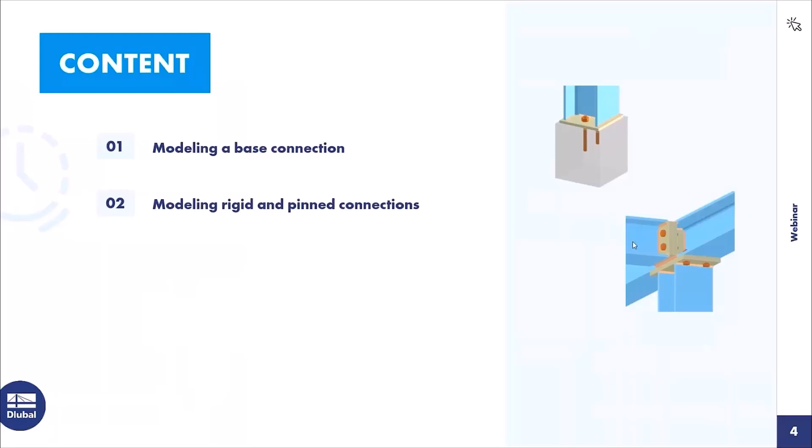For today's agenda, I will model different connections. I'll start with a base connection, then rigid and pinned connections. Then follows the connection design, and we do a stiffness analysis. The next point is result evaluation and documentation, and the final point is an outlook.

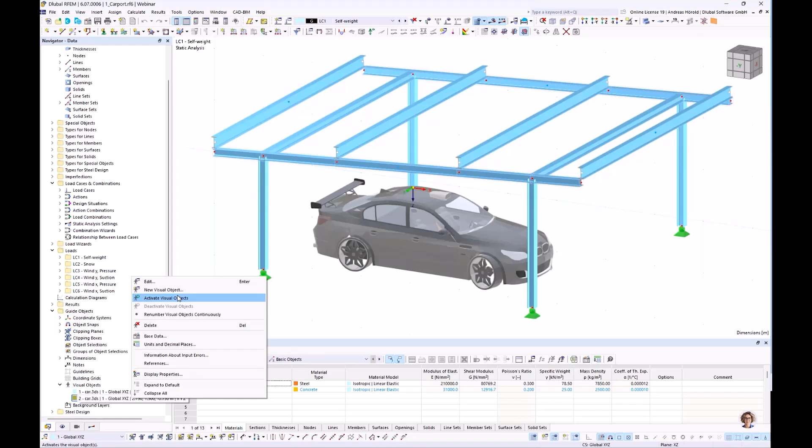That's the model for today: a larger carport with dimensions of 6 meters by 7.5 meters. I'll display two guide objects—visual objects—which I activate: two cars so you can estimate the dimensions of the carport.

That's the reason why it's made of steel. It's a little bit larger than a normal carport. Okay, I'll deactivate the guide objects now.

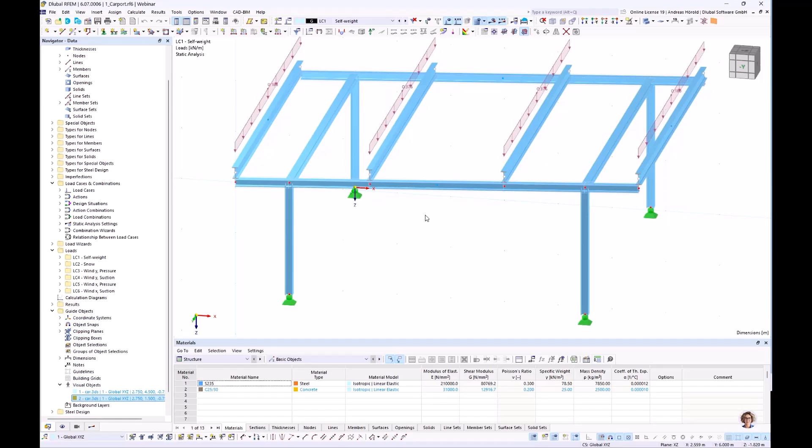So we have different load cases: self-weight, snow, and wind in all directions. Then there are different load combinations for the ultimate limit state and for the serviceability limit state design, as well as load combinations for the design of lifting up.

So then I did a steel design. Design ratios by members—all designs are fulfilled, with larger and higher design ratios in some members.

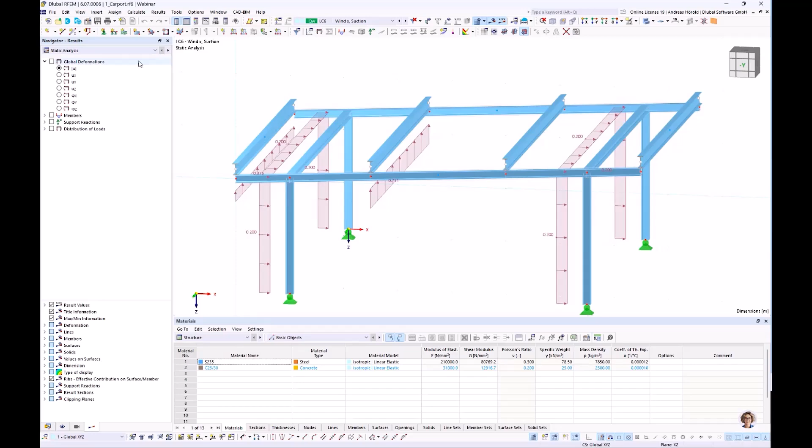Then we activate the steel joints add-on in the base data add-ons. Steel design is already activated, and we activate steel joints so we can design all the joints of the structure. For standards, we use the Eurocode and the German National Annex for the load cases, classification, and combination wizards for steel design and also for steel joints.

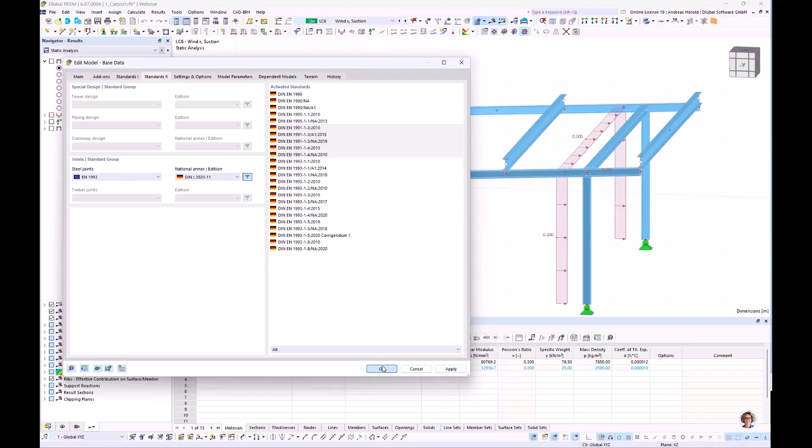So then we start with the first joint. I right click on that node and choose create steel joints. It's only one member, so the type is 'ended'—that's clear.

Let's turn back to main and check the ultimate configuration—that's default. You can perform a buckling analysis, which is useful if you have larger plates such as webs. That's quite important: the design check for the plates has a limit plastic strain of 5%, also for the welds. You can change that, but I'll leave it, since that's the value from the Eurocode standard. I'll leave all the other settings as they are.

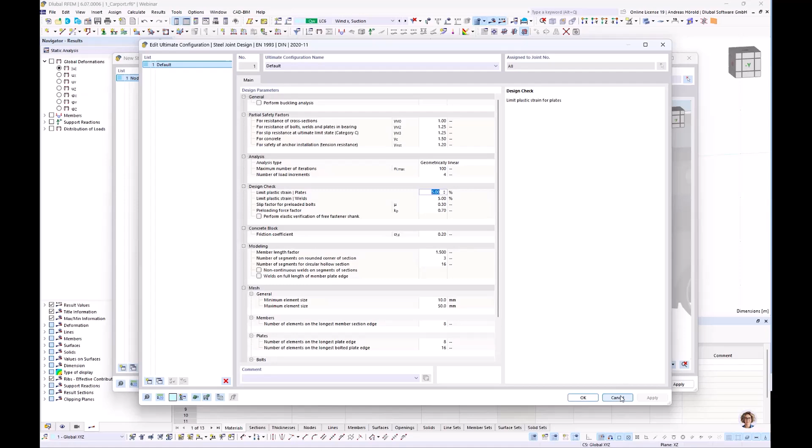Then we turn to components, and I can press insert component at beginning or at end—it doesn't matter. I select this component: base plate. Now we have different modifications: stiffening elements, connection elements, and others, including fasteners. You can move the mouse over the image and see a tooltip showing what connection or stiffening element is available. So I select base plate.

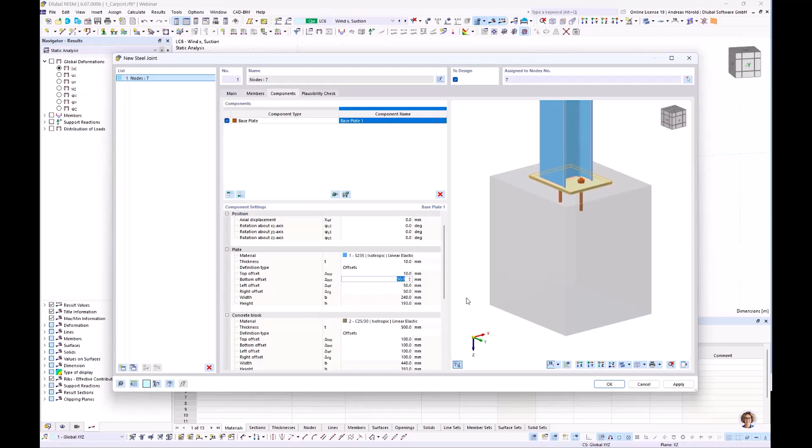That already looks quite good. That's a concrete block—we decrease it a little bit. Let me enter some values: the thickness of the plate should be 10 millimeters, and the top offset in all directions is 10 millimeters. To overtake the previous value, you can press F8, F8, F8—then we have the value on all sides.

So then the thickness of the concrete block should be 200 millimeters, and I define the offset again—also a very small offset of 10 millimeters. I overtake it again with F8.

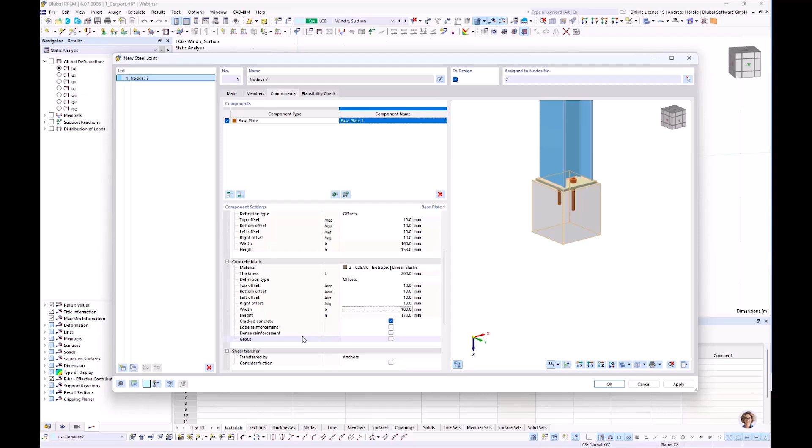So then you can consider cracked concrete—we do that. You can also consider edge reinforcement, dense reinforcement, and grout. You can display that grout, but no, we don't use a grout. Then you can consider the shear transfer by anchors, and you can also consider friction if you want.

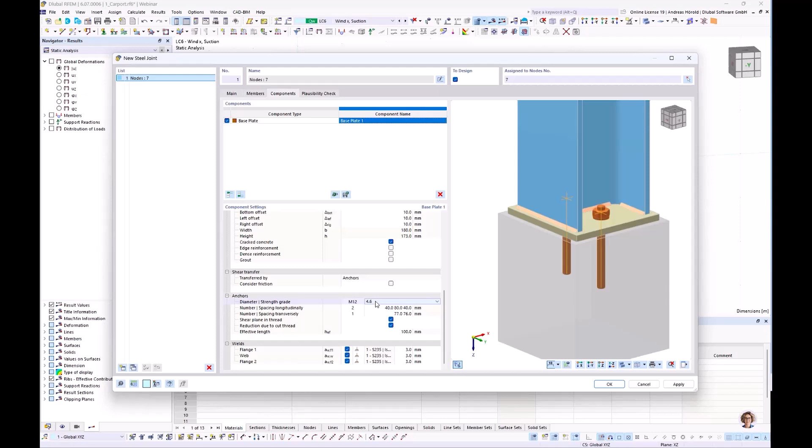So then we turn to the anchors. M12 is okay in our case, and we choose 4.6 for the strength grade. These dimensions and distances are okay.

Then we change that value so it's exactly in the middle. The shear plane should be in the thread, so we consider the reduction due to cut thread. So the length of the anchors should be 100 millimeters—that's okay, and the welds are also okay.

Yeah, that was very quick—that's all for this joint. We do the plausibility check, and that's okay. We take a look at the model, and now you can see the joint, or the column base joint, here.

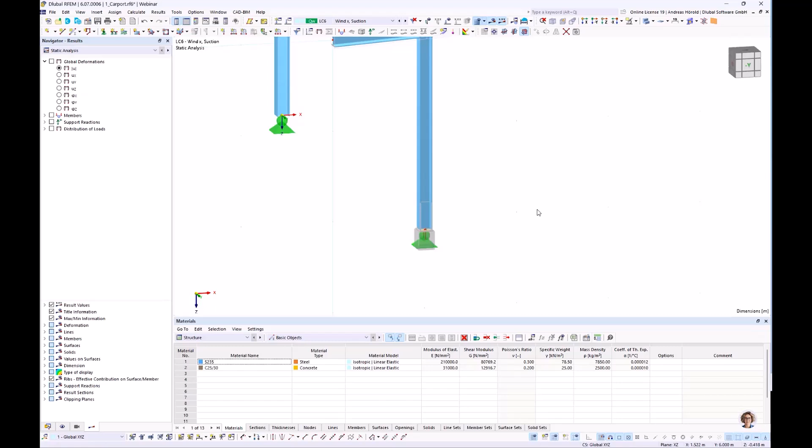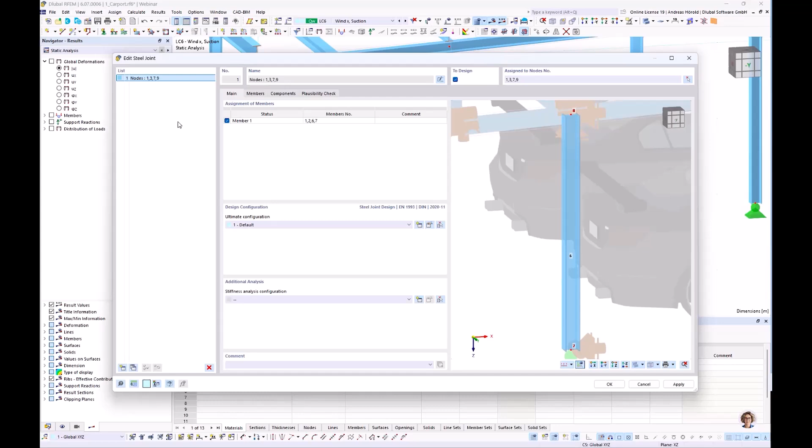You can disable it when you press no joint model, or you can display the simplified joint model right above here. But we would like to display the detailed joint model. So I double click on the steel joint again, and I assign also the other nodes right above - this one, this one, and this one.

Now all 4 nodes are selected. So the next joint is the frame corner. We can see in the model the steel model is stiffened in all directions by frame corners - in this direction, also in this direction. There are no bracings.

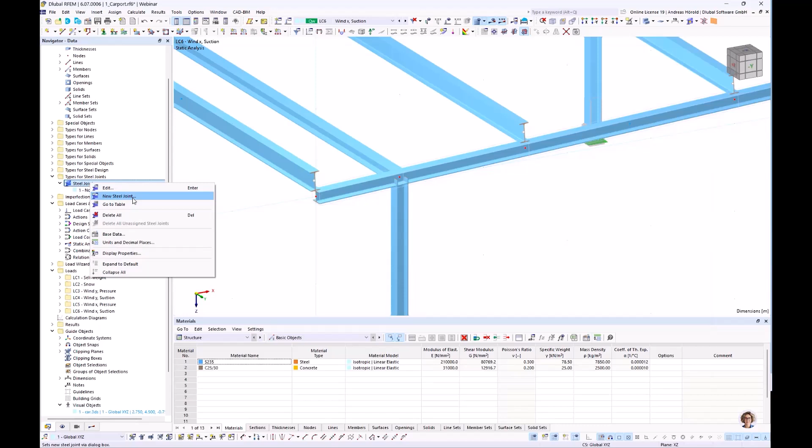And we would like to define the connections on the frame corner. So I show you another way to do that. You can see in the navigator data the types for steel joints. One steel joint is already there, and I can do a right click and press new steel joint. But now I have to assign the node.

For members, those 4 members are connected in that node, and we would like to do a stiffness analysis for the frame corner. So that's why I select initial stiffness, no interaction. Let me go to the settings. Initial stiffness is selected.

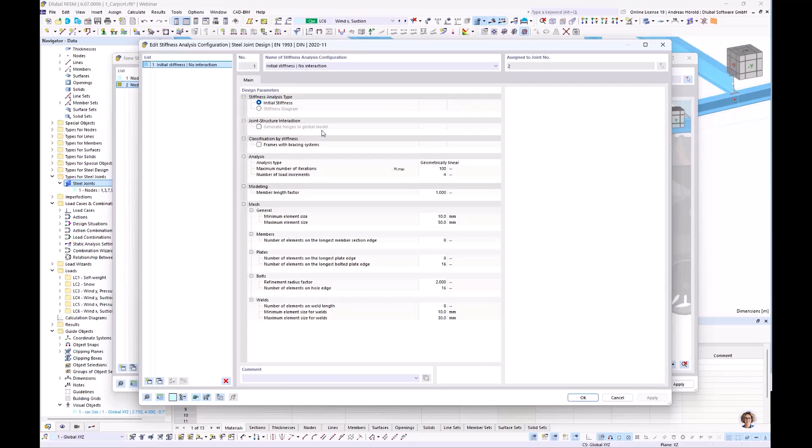For the future, there will be another stiffness analysis type available, the stiffness diagram. That's for larger connections with high loadings, where you can consider the plastic behavior. Then in the future you can select generate hinges in global model. That's not yet available, that's why we do that by hand later. Okay, that's all.

So we turn to members. At least one member should be supported - that's ended. This one is continuous, and automatically member 3 is also continuous selected. So for the column, we would like to do a stiffness analysis.

The program should calculate the stiffness of the joint in or around Y and around Z, meaning M,Y and M,Z. And for this horizontal beam, there should be also a stiffness analysis M,Y.

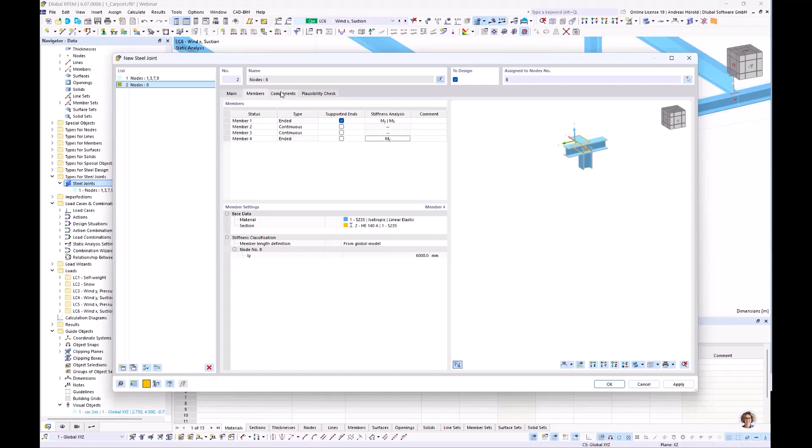So then we turn to components. We insert a component, and this time an end plate. You can move over it, end plate in the middle. So the connected member 1 should be the column - you can see it's selected in the right window with the yellow selection.

And the reference member should be the member 2 and the member 3. Okay, so you can already see a connection.

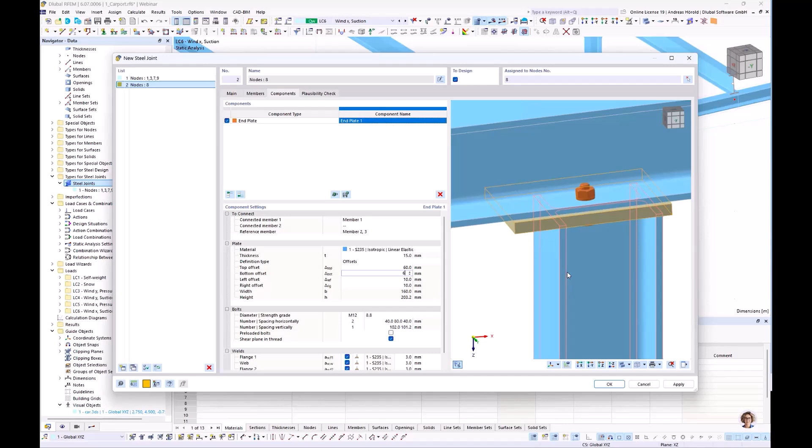Now we have to modify it with the next steps. So the thickness of the plate should be 15 millimeters, the offset in this direction should be 60 millimeters, also in the other direction. And in this direction, there should be no offset.

Now you can see the changes in the window anytime. So M12 is okay, but we choose 10.9 as strength grade.

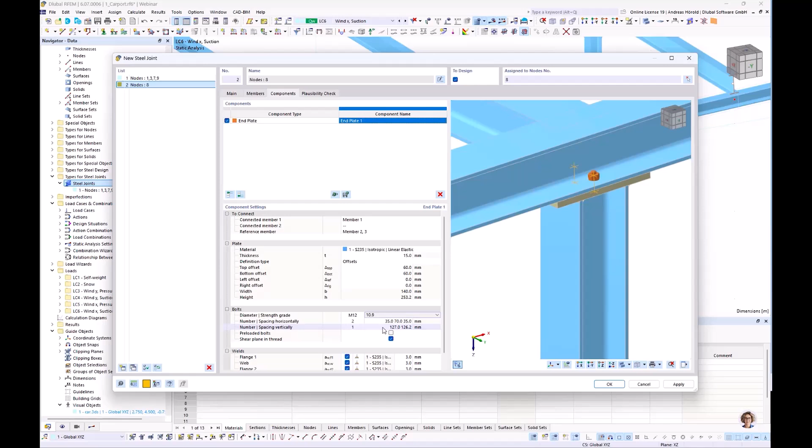So that's okay, all those distances, but we select also for the spacing vertically 2, and I select these values, and that looks quite good.

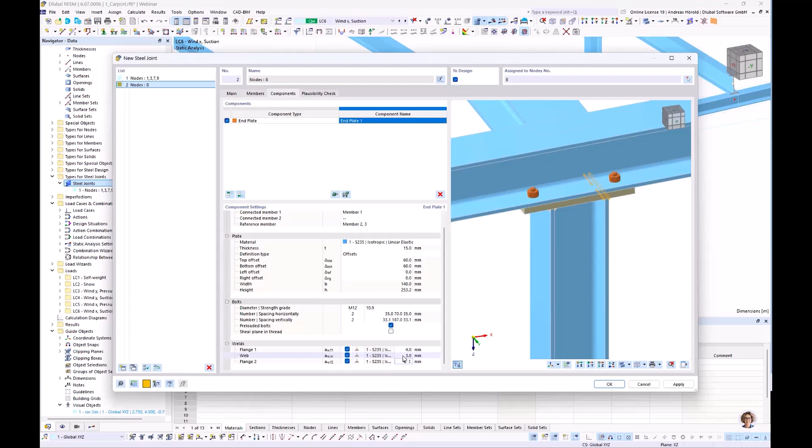We use preloaded bolts for this connection, and the shear plane shouldn't be in thread. And I change the welds for the flanges to 4. Now you can see anytime what parameter should be defined.

So that's all for the connection of the column to the horizontal beam. And now we would like to connect this horizontal beam with this horizontal beam.

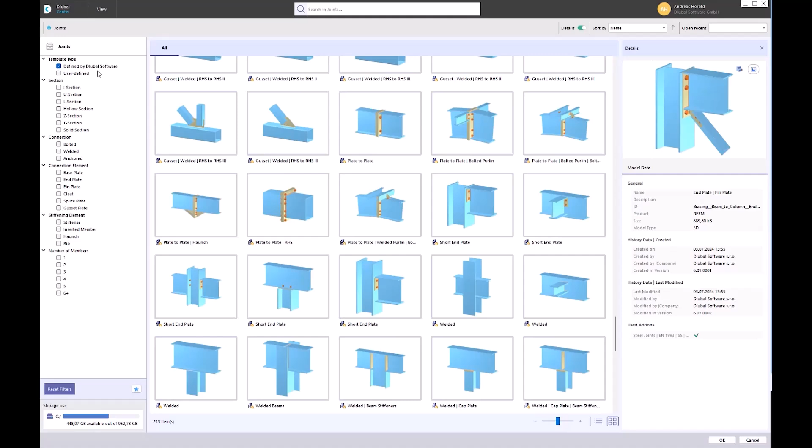That's why we insert a component from the library. So I select that. And what's quite new, the library is in the Dlubal Center. Now you can see different template types, also user-defined from me. So I select only the defined connections or joints by Dlubal Software.

We've got the I section. The connection is bolted, and there are 3 members in the connection. So we would like to select end plate to plate. That looks quite good.

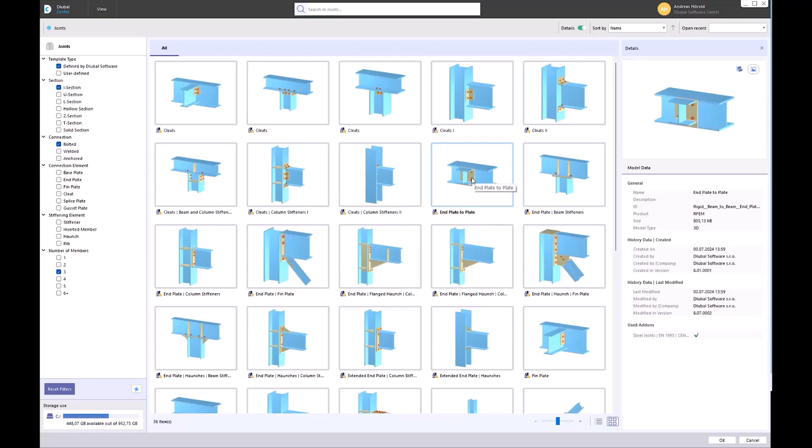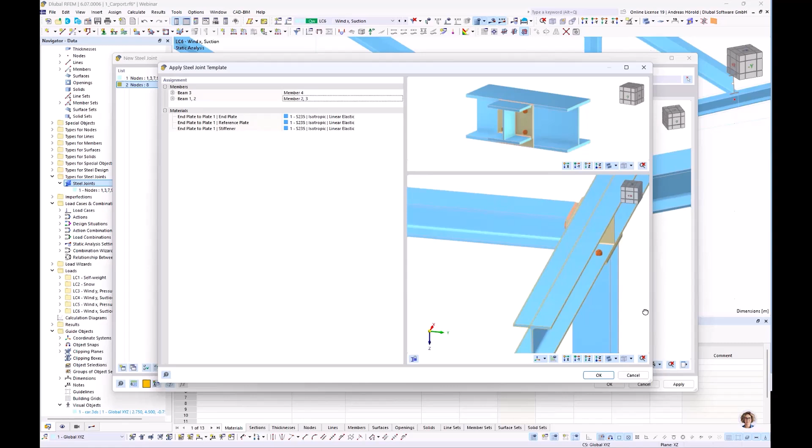So I double click on it, and we should see a preview in some seconds. But at first we have to select the member that should be connected, be member number 4, this horizontal beam, to member 2 or to the members 2 and 3. The preview looks quite good, and we can overtake it with OK.

So let me change the values. Also a thickness of 15 millimeters - no, we have to select that line. Thickness of 15 millimeters, okay. Minus 7.5 is okay, that we can consider a weld here.

Okay, all the values for the end plate 1 is okay, but we have to modify the reference plate - 15 millimeters. The top offset and bottom offset is okay, but I decrease the width, so that we have the same dimension as the end plate. So it should be stiffened.

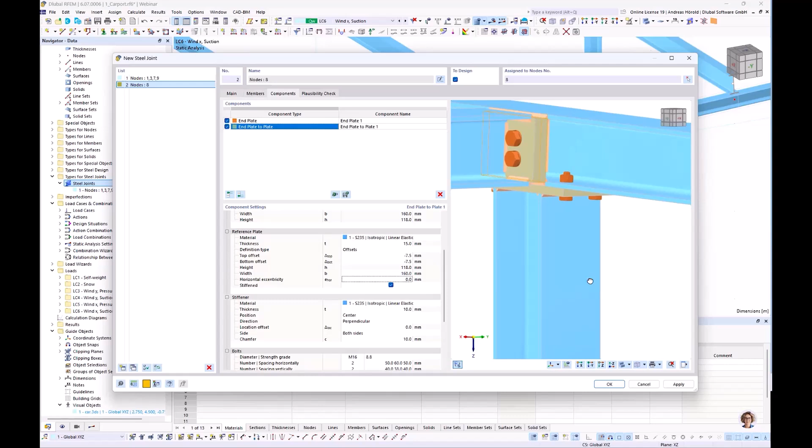Okay, but not on this side, because we would like to define two stiffeners here in the back, but we can't do that because the connection would be closed. So center is okay, but not both sides, only one side.

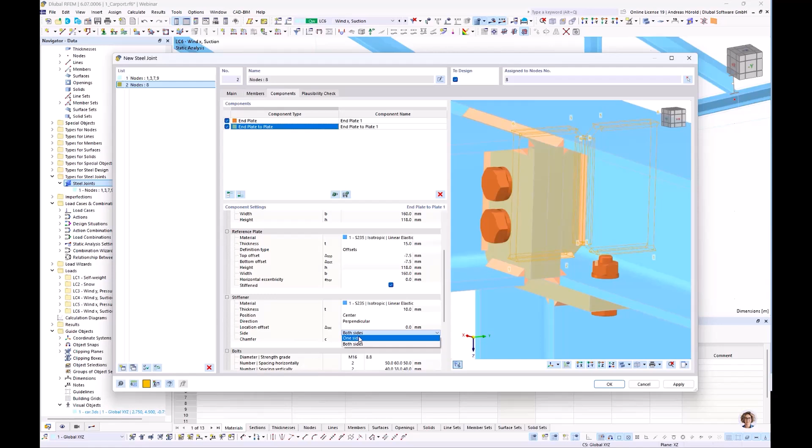So now this stiffener is disappeared. Okay.

So then the diameter should be M12, 10.9 as strength grade.

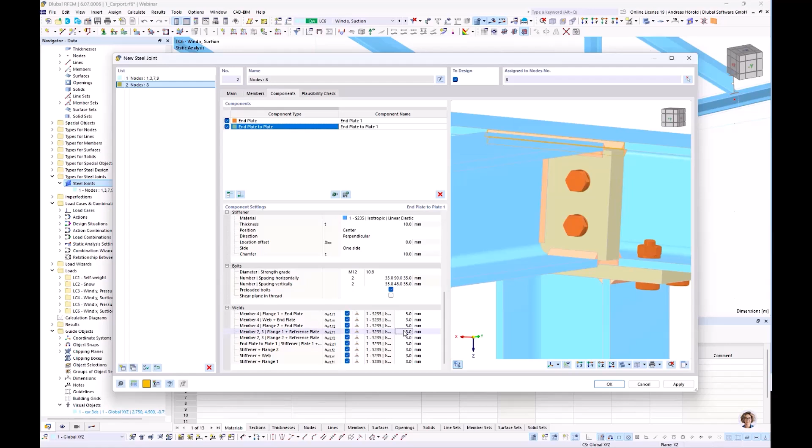So let me change the spacings - 35, 35, then also here 35. Okay, so preloaded bolts and the shear plane shouldn't be in thread. The welds are okay, 5 mm for the flanges and 3 mm for the webs.

Okay, so then we have to add the stiffeners here. I insert a component at the end - you can see the stiffener here. The stiffened member should be this one, the horizontal beam, and the reference member should be the column.

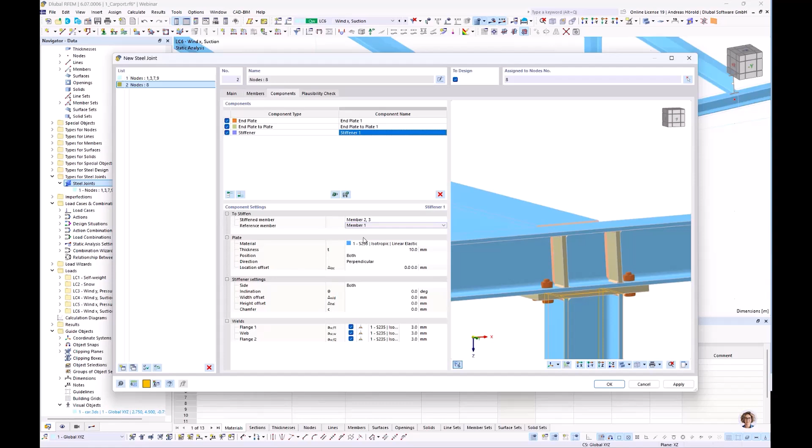So then position is okay.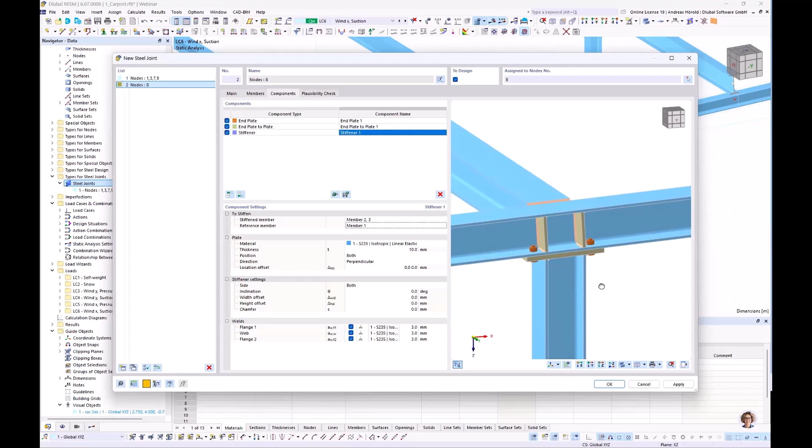You can say perpendicular or parallel. Sorry, that was a wrong click. So that looks quite good.

But it shouldn't be on both sides. You can see that would be closed here. That's why we select the right side. Then we have only the stiffener on this side.

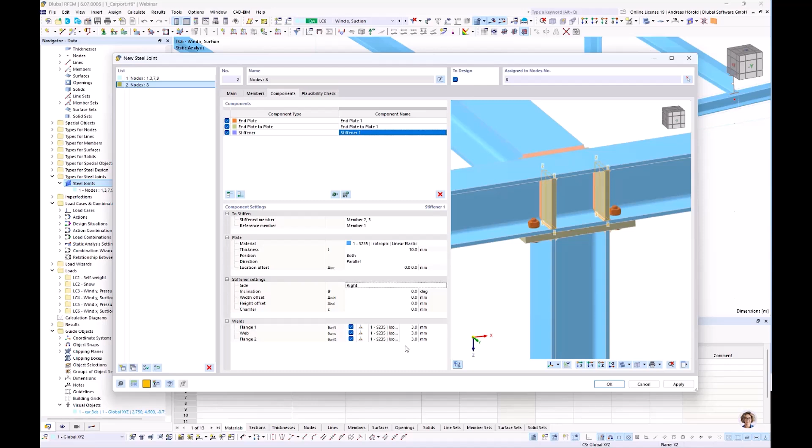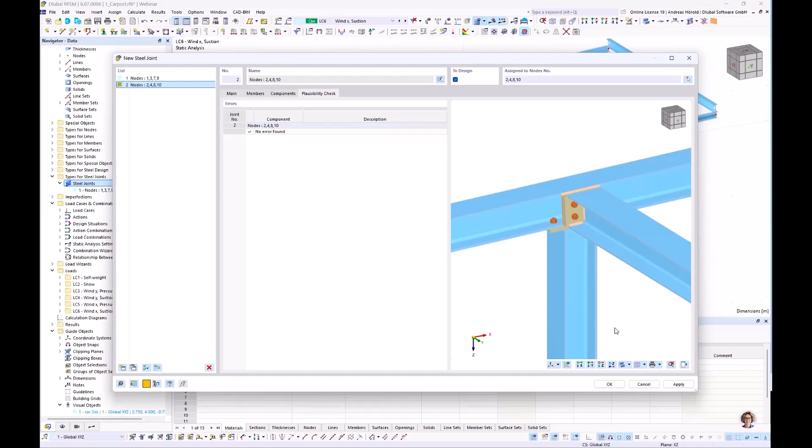Okay, so the welds for the stiffeners are okay, 3 mm. Plausibility check is okay. I can select also the other frame corners. Okay.

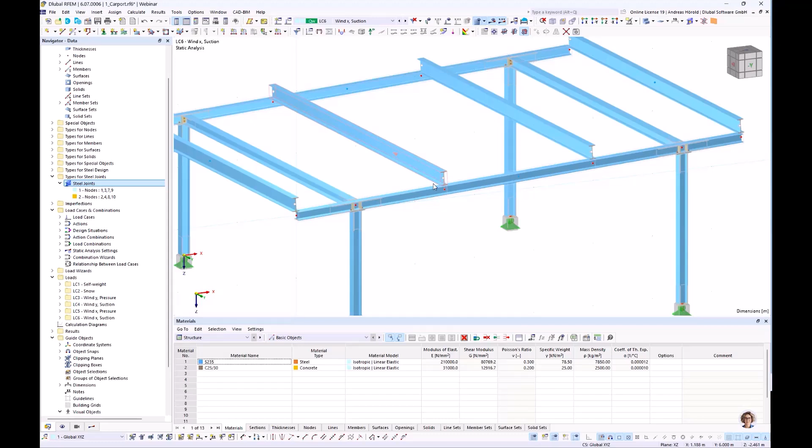We can display all in the model. Okay, that looks quite good. Then we add joints for the purlins. I do a right click, create steel joint.

So then members are, those are the 3 members. This one is supported and also continuous. And member 3 is also continuous. So then component.

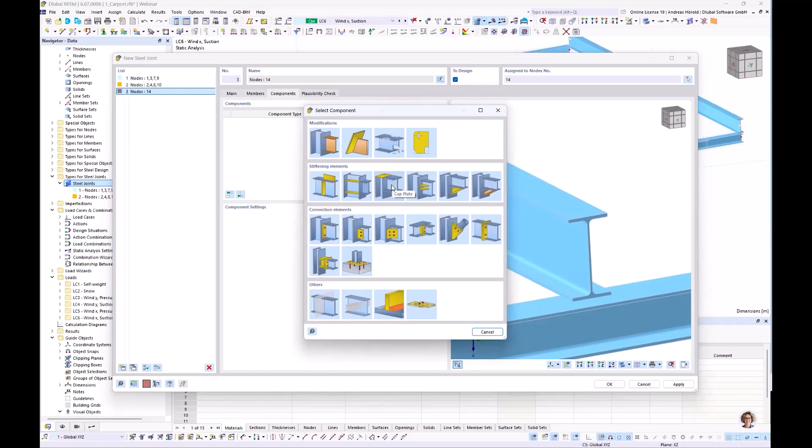At first we enter a cap plate at the end, not that we create a gable support. So yeah, beginning or end, that doesn't matter. You can see the cap plate and the second line in the middle. So this member is member 2, that's okay.

10 millimeters is also okay, but I define a top and bottom offset of -5 millimeters, so that we can weld that here. So then...

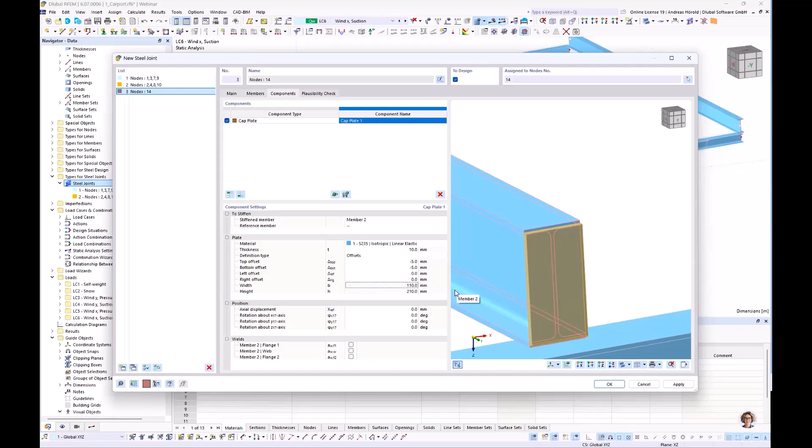That's now in the middle, and we can select or define an axial displacement that we move it to the end. So that looks much better.

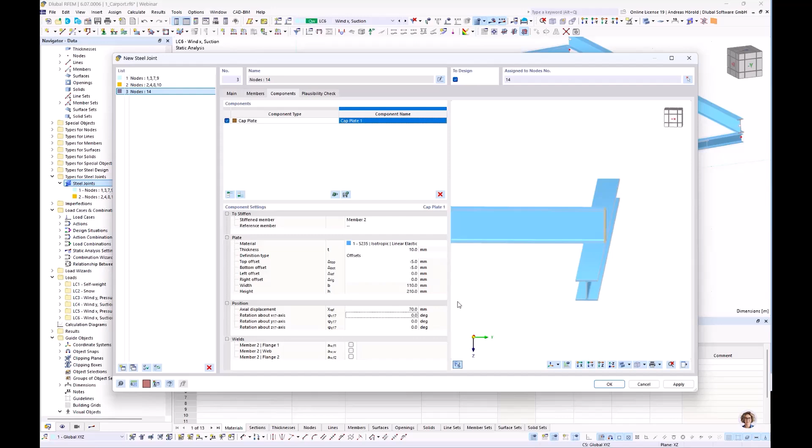So then welds for the flanges and for the web, 3 millimeters. That's okay. So and now we have to add fasteners.

We insert component at the end. So and you can see in the line below others, and there are the fasteners. So the component 1 is a plate, a member plate.

Yeah, a plate is, for example, that cap plate or an end plate, and a member plate is a plate of the member, the flange or the web. So that's why we select member plate. I zoom in a little bit.

So and then at first we select member 2, flange 2. You can see it in the preview what is selected. Member 2, flange 1. Should be connected with member plate and the upper flange. Okay.

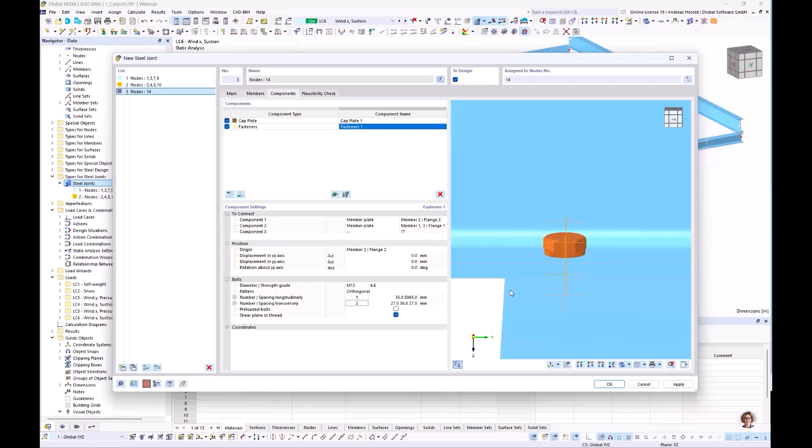Yeah, and now it's in the middle of the member. I enter 35 millimeters, and you can see now the bolts are okay. I changed that value to 25 millimeters. Okay, no preloaded bolts, and the shear plane shouldn't be in thread.

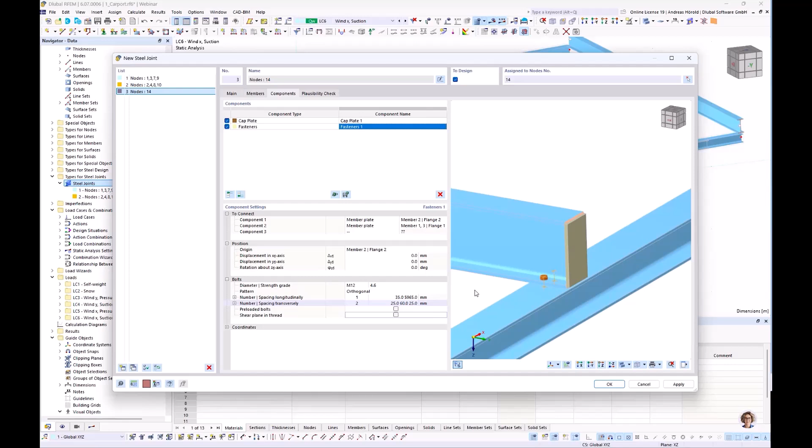Okay, that's all for this connection. Plausibility check is okay. We select the other inner purlins. The connection doesn't fit for the purlins at the edge because of the bolts here.

So plausibility check is okay. So and we can take a look at all the connections. That looks good.

So now I turn back with double click in this dialog, and now I copy that connection for the outer purlins. So at the bottom on the left side, copy selected joints.

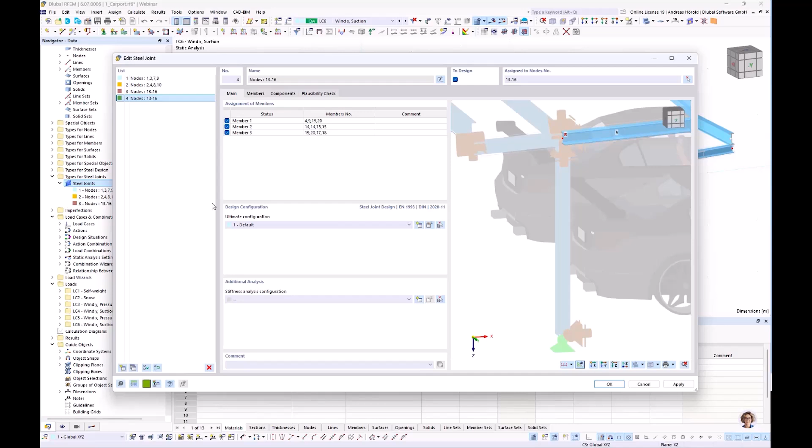So at first I have to select the other nodes. So 4 nodes. Okay.

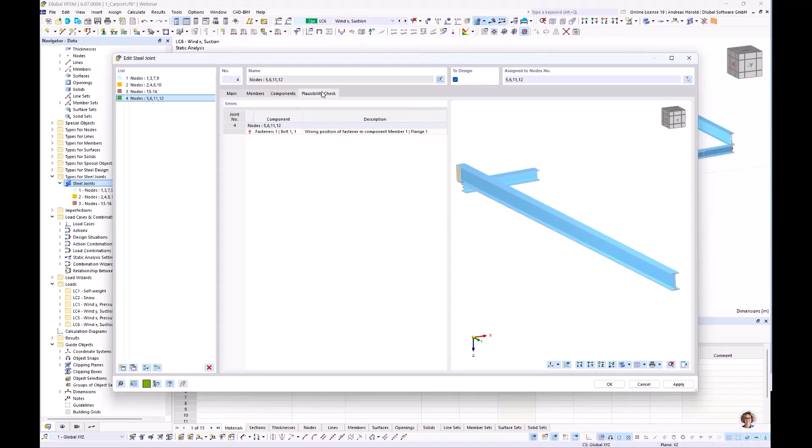And there should be an error message, wrong position of the fastener. That's what I mean.

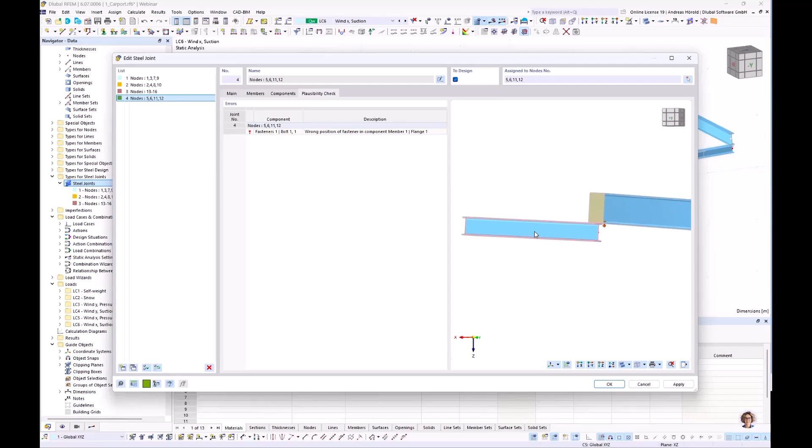Okay, we have to enlarge the horizontal member. So how to do that?

We insert a member cut at the end. Left above, member cut. You can cut a member or you can increase the length of a member. Member to cut is member number 1 by member number 2.

So, and not the closer end, but the farther end. You can see now the length is okay. So now the plausibility check should also be okay. Yeah, that's all.

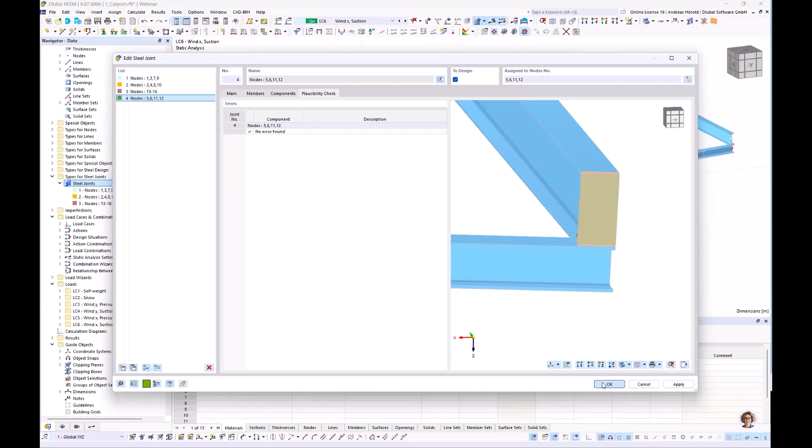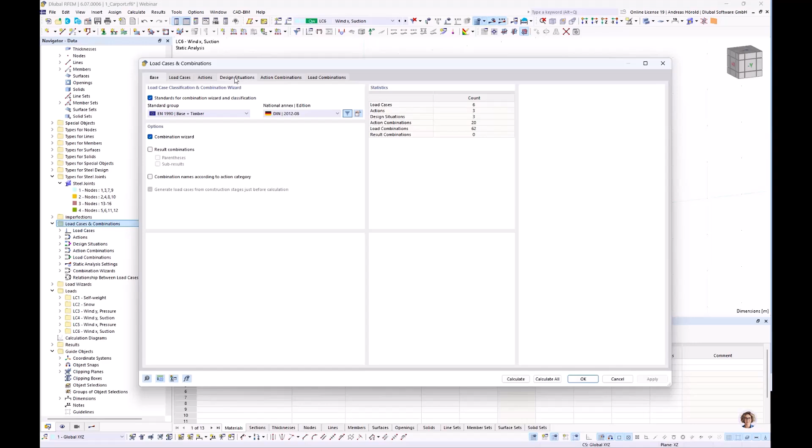Okay, now all connections of the model are created. Let me go to the load case imperfections in the navigator data, right click, load cases and combinations. And let's move to the design situations. Ultimate limit state design, the steel design and the steel joints design is activated, that's okay.

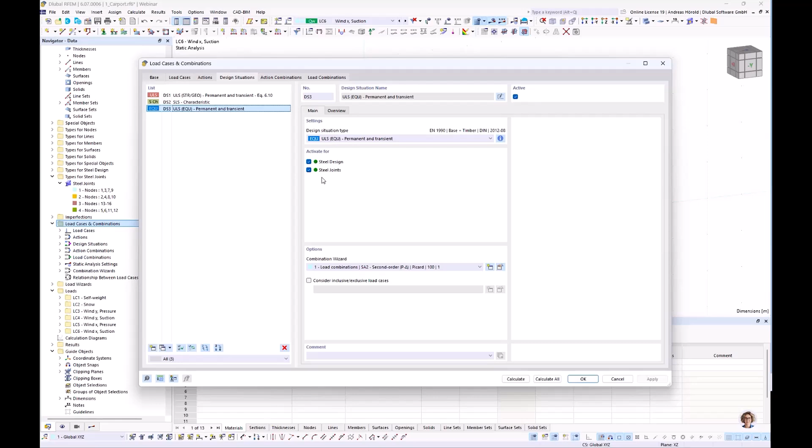Serviceability limit state design, only steel design is selected, that's also okay. And for this design situation, EQU, also both designs are activated. So to skip the calculation time, I turn to an already calculated model.

So in the table below, we can take a look at the steel joint design. I turn to the table design ratios by joint. So, and you can see on the right side the design check types.

I overtook the model from the German webinar. There are some German words, but that doesn't matter. Take a look at the design checks: the anchor check, the concrete check for the column base connection, the plate check of the frame corner, the ultimate limit state for the pre-loaded bolts, and the weld check.

I double click on that line to go to the details of the check. When it's opened the first time, it takes some time, not in the second step. So you can see the design check for the welds, and you can also print that in the printout report. We will do that later.

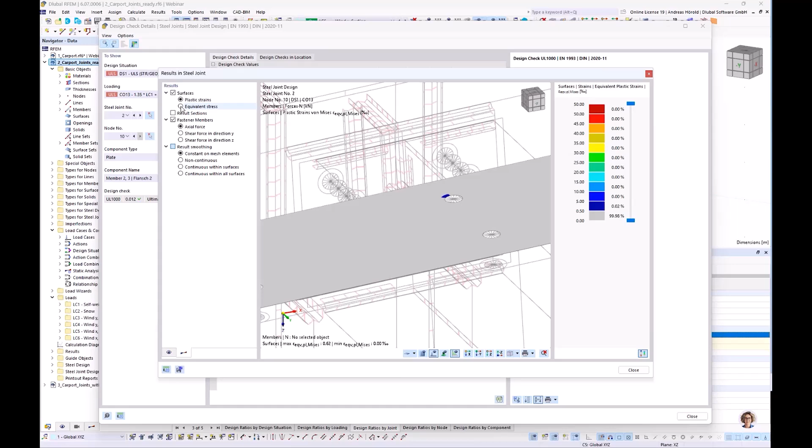But we have, of course, I can show that we have also elastic stresses. I check here equivalent stress, and you can see the elastic stress, and also only in this area where there is a small plastic stress, and that means also a plastic strain.

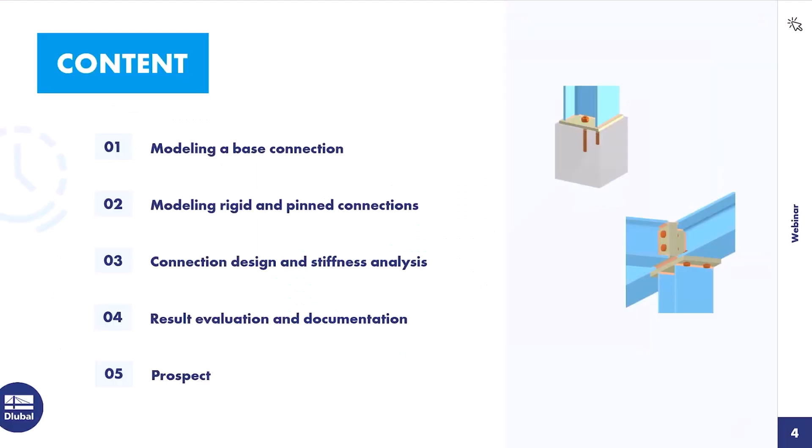In our model we have a small plastic strain, and we consider that with the maximum plastic strain, that's the value from the Eurocode, 5%. That means you can't increase the load with a factor of 5 or so. That's not possible, because that's the area of the plastic strain, and we have already got an elastic stress and elastic strain in the model.

And if we increase the load a little bit more, it would quickly give us a higher design ratio. Okay, I turn back to the model.

So let's take a look at the stiffness analysis. Those are the rotational stiffness values for the frame corner. Those are the values from member 1 for the column, and those are the values for this horizontal beam. And we have to overtake those values by hand.

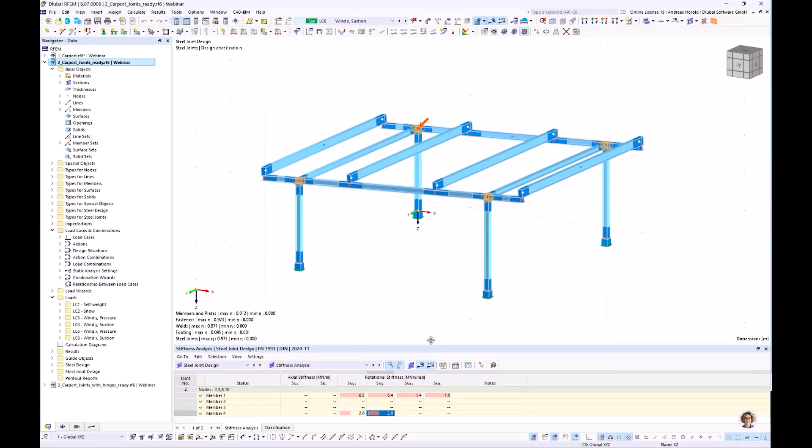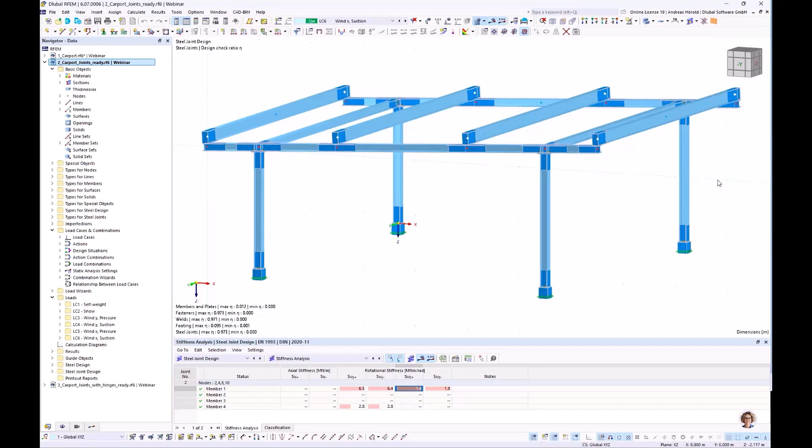So we start with the columns, the column ends. We overtake these two values, taking the smaller value. So I double click on the member. I select hinges.

We turn to the dialog hinges, and we need to consider member hinges at the end. The rotational spring constant should be entered here. I move that dialog a little bit higher. You can see the rotational stiffness is displayed here in mega Newton meter per rad.

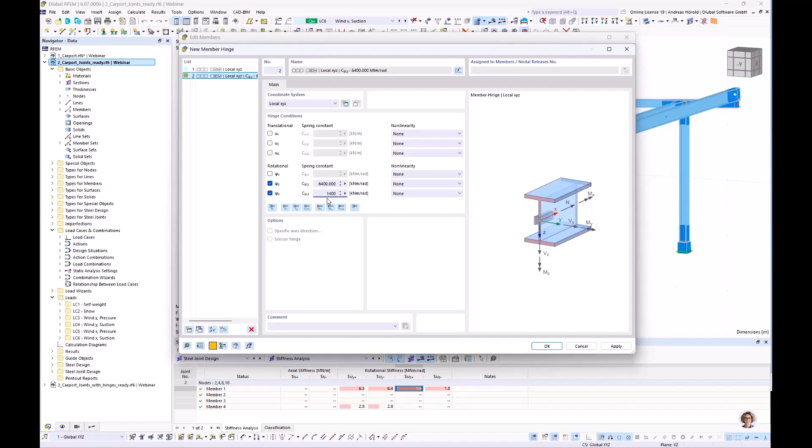And I have to enter it here in kilonewton meter per rad. So that's why I have to multiply it by 1000: 6400, and in this direction 1400. This value goes here and this value goes here. Okay, so at all member ends.

So now you can see the hinges here. So the same for the horizontal beams. Double click, hinges. I turn to hinges.

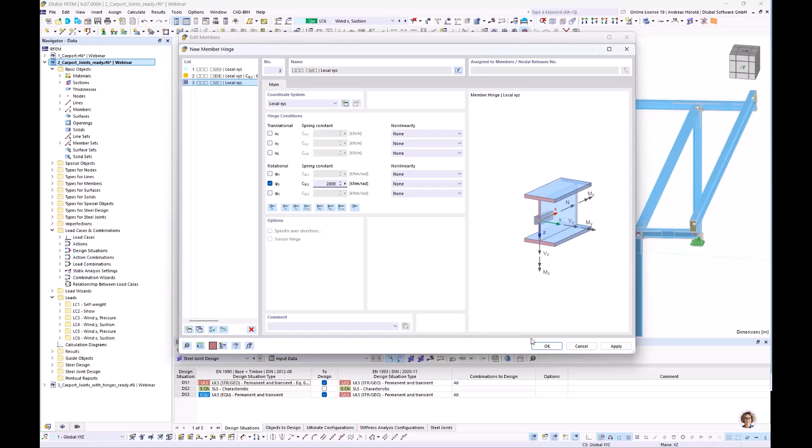And enter hinges for MY: 2800. Okay, the member start and the member end. So all member hinges are created, and then we can calculate the model again.

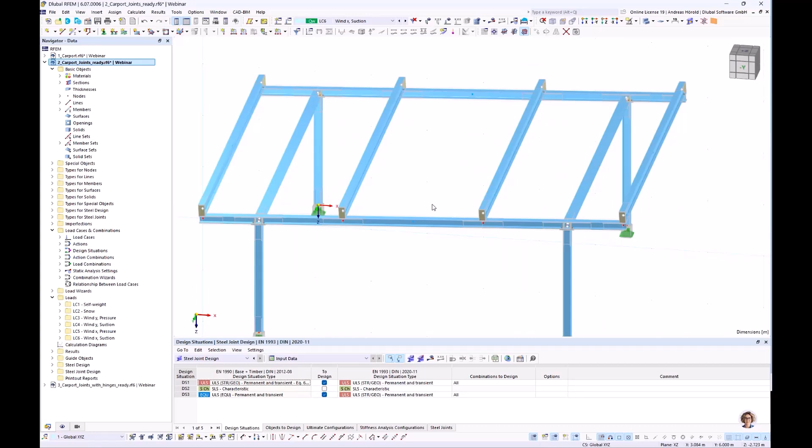I skipped the calculation time and turn to an already calculated model. Let me check the steel joint design. So all design ratios are under 1. That's okay.

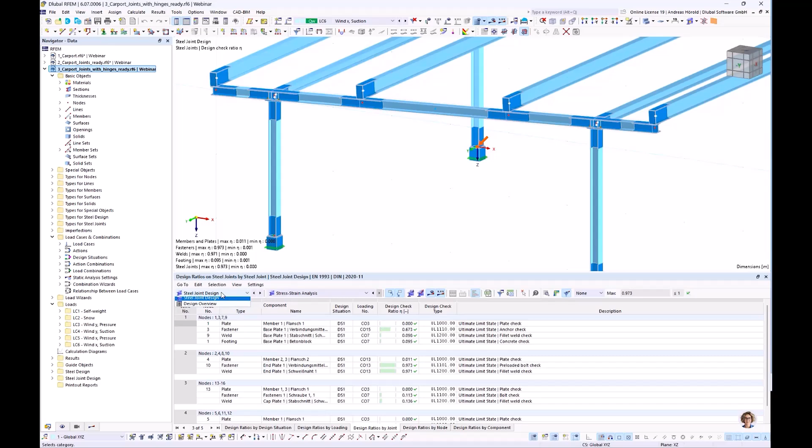I turn to the steel design ratio by members. And you can see the maximum design check is for the serviceability on that point, and that was quite lower in the original model.

Let me compare that in the PowerPoint. The design ratios for the ultimate limit state design are nearly the same as in the original model, with differences of maybe 1 or 2%. But for the serviceability limit state design there are larger differences, which you can see in the PowerPoint.

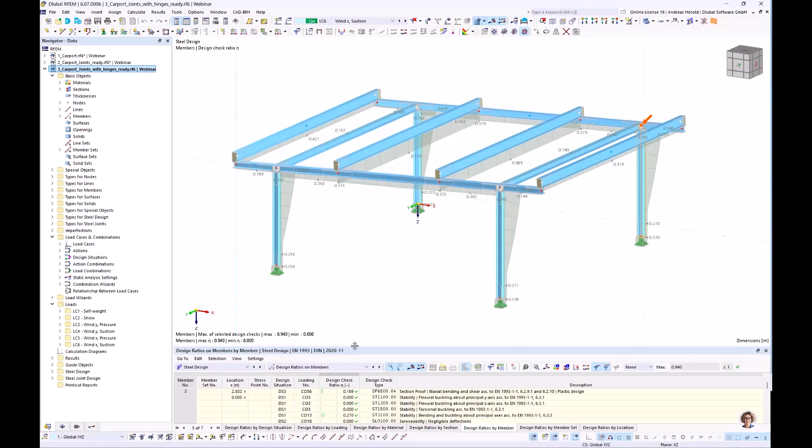Okay, I turn back to the model and we turn to the next point for today, the documentation. I would like to print detailed results, for example of one connection, steel joint design, where I used the preloaded bolt check. Let me open the design details, and I would like to print the equations from the standard and the design in the printout report.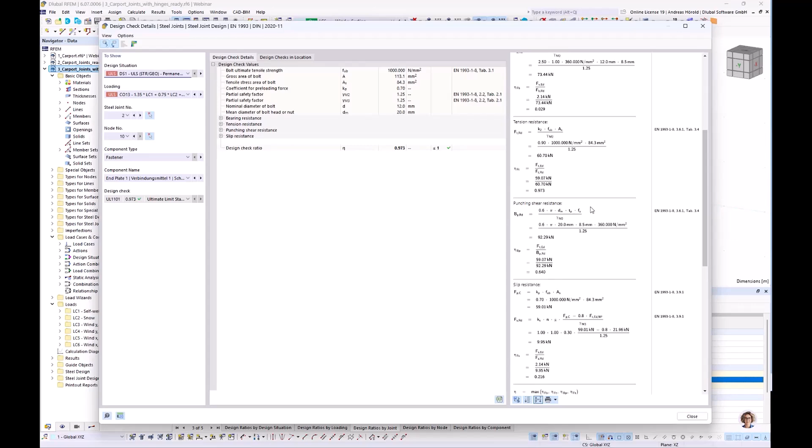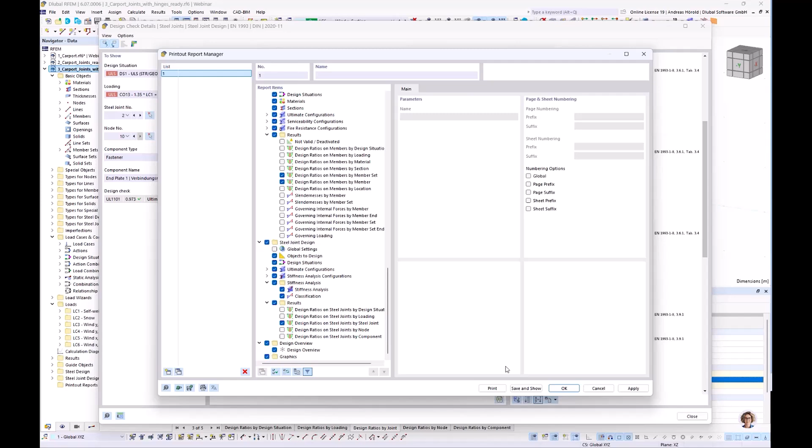So those equations should be displayed in the printout report. That's why I print graphics to the printout report. So this is the printout report. I leave the settings, I uncheck the steel design for our webinar. We printed steel joint design ratios by steel joint. That's quite okay, I press save and show. So the printout report is creating.

General settings, for example for the cover, I can do a right click, edit. I can enter the client here, John Doe. You can check the preview image or display the preview image. Okay, I have increased that value for the printer.

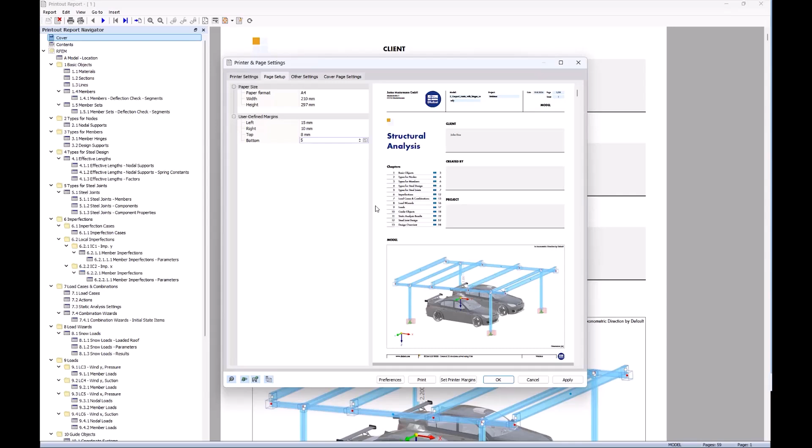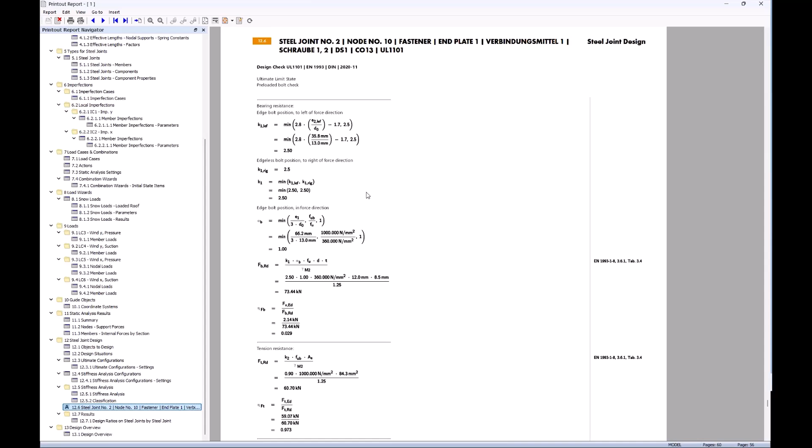Then let me find the equation or the detail check, what was printed here. I can also move that at the end of the printout report. I would like to print another graphic as an example, so let me move that to the other screen. I leave that dialog and double click on the column base joint components.

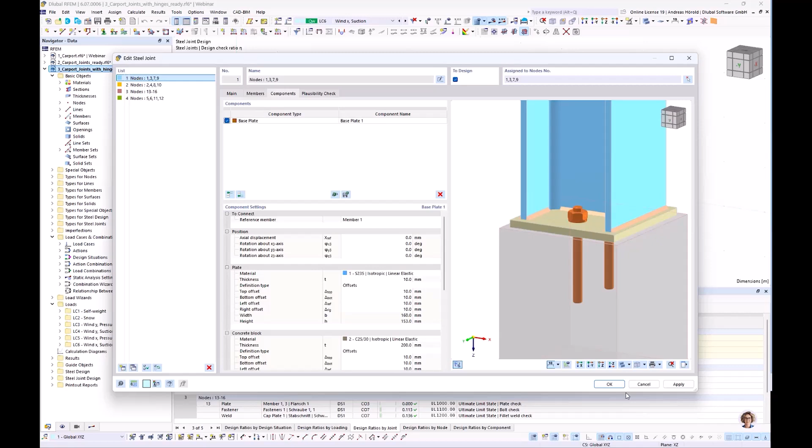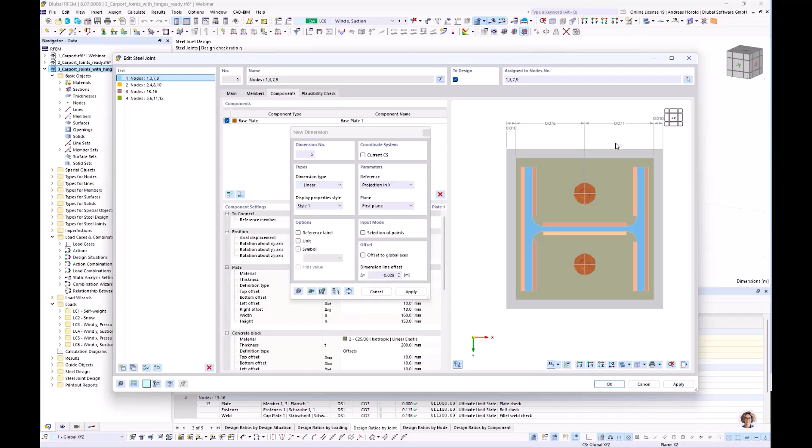I select the view in +Z direction, and with a right click I can add a new dimension. For different dimensions I select linear, so in the X direction, and I select the corners of the plate, the concrete block, and the bolt. Then in vertical direction the same.

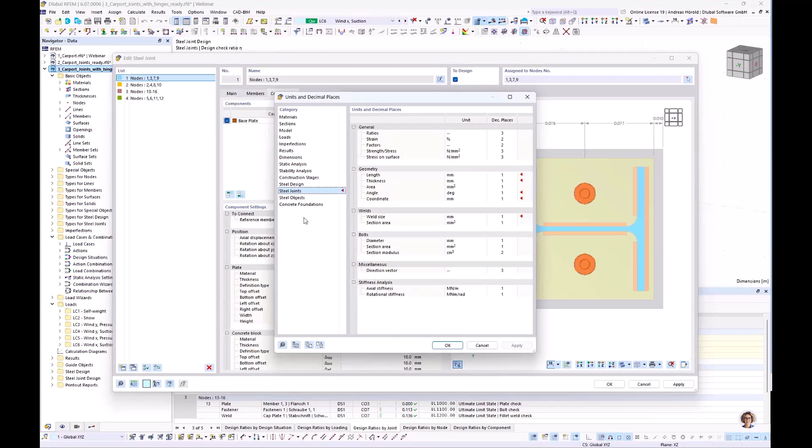We can also display the values not in meters but in millimeters. At the bottom left we can change the units for the dimensions from meter to millimeters. Okay, so that looks quite good.

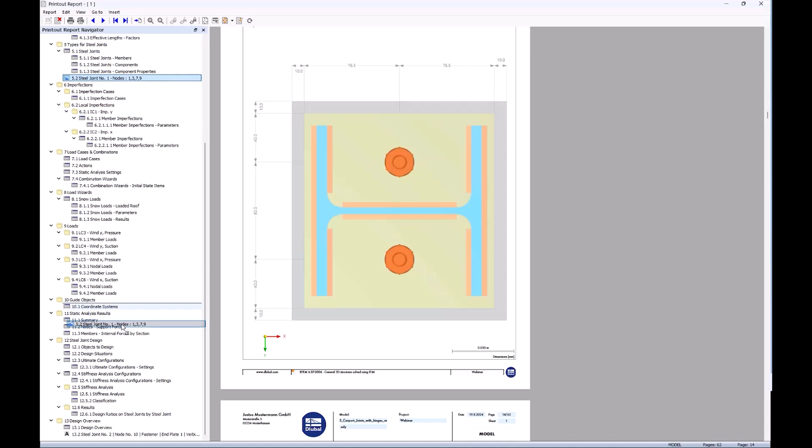I apply that and print it in the printout report. So the printout report, okay, then maybe window filling, the rest of the settings are okay. I press OK because the printout report is already open, and I move it to that screen again. You can see under types for steel joints the graphic. I move it also to the end of the printout report.

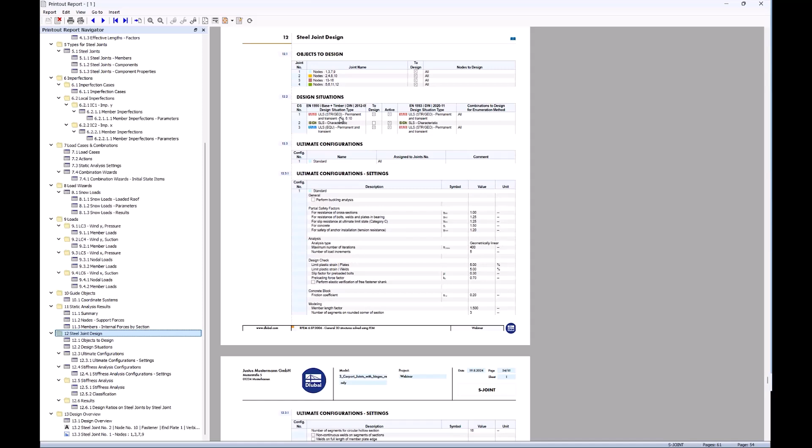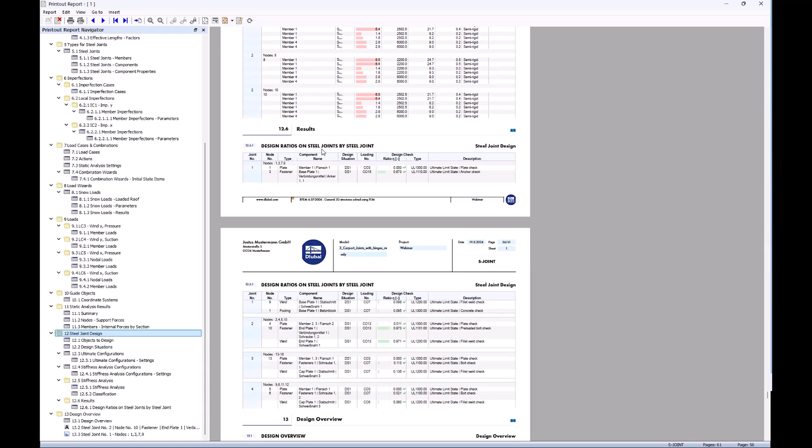Now let me check the steel joint design settings, the objects to design, situations, the settings, classification, stiffness analysis, and here the design ratios on steel joint by joint. At the end we have the details of the check and the graphic.

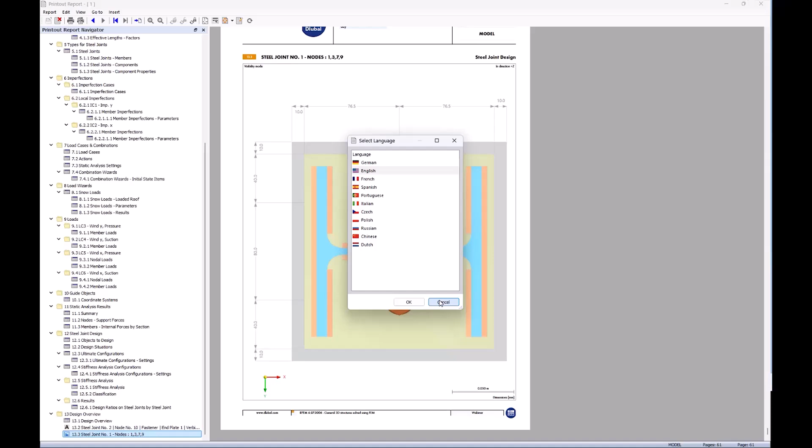Maybe some general features: you can print the printout report as a PDF or export it to an HTML file. You can translate the printout report, or it would be translated automatically into 10 languages. Okay, that should be all for the documentation.

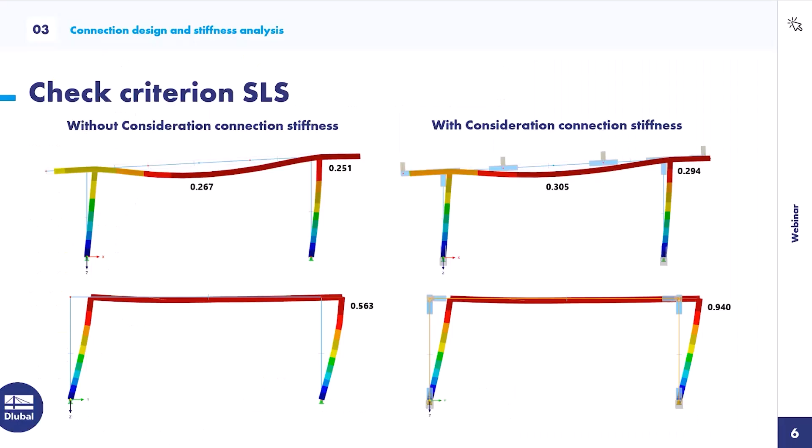We plan to release the joint structure interaction, an automatic generation of the hinges with the associated spring stiffnesses that we did manually in this webinar. I also mentioned already the new stiffness analysis stiffness diagram, where nonlinear stiffnesses under larger loads are considered.

Then design of connections with result beams will be available. Then creation of concrete block in component fasteners—just imagine you would like to connect the flange to a concrete wall, and that would be possible. And the last planned feature mentioned today is connections with massive cross sections, e.g. round steel.